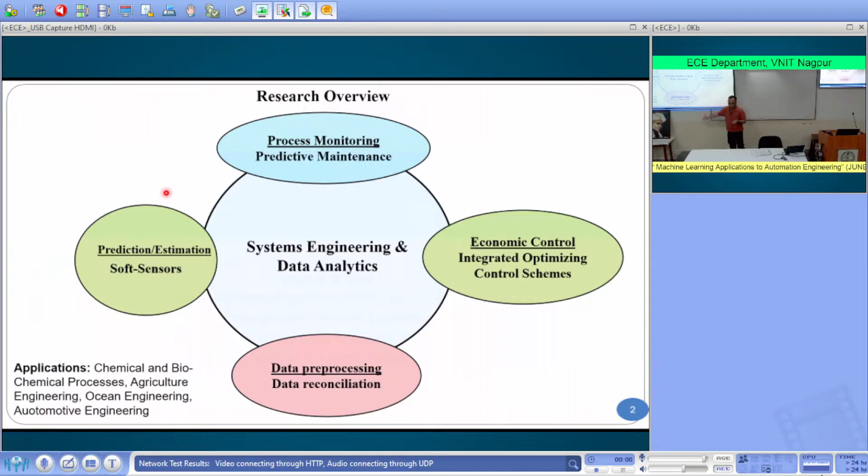To begin with, I'll give an overall hierarchy of any industry. If you look at any process industry, this is the overall hierarchy you face. Let's take any process industry like a refinery - if you have a refinery, or any semiconductor process or pharmaceutical process where you're trying to manufacture penicillin or tablets, or any process industry with several steps, this is the regular planning process steps we have.

We have a unit, a process or a reactor, let's suppose a nuclear reactor - you're trying to manufacture something through it. So you have a process or a plant, where in order to optimize or ensure safety, to control or maintain that process, you need measurements - you need to take some information from it, keep taking information. So the layer immediately after the process is something called measurement and actuation.

So which takes the measurements from the process and tries to understand the behavior. Let's suppose you go to a hospital with a certain amount of fever or whatever condition you have. The first thing is that you will put a thermometer inside, so that you get to know the condition of your body, what is the status of your temperature.

Like that you have some sensors here actually, for measurement and actuation. What is the temperature of the reactor, pressure of the reactor, what are the different conditions. So you have sensors and actuators which are directly mounted on any particular reactor, and from there you have the first layer, which is the safety logic.

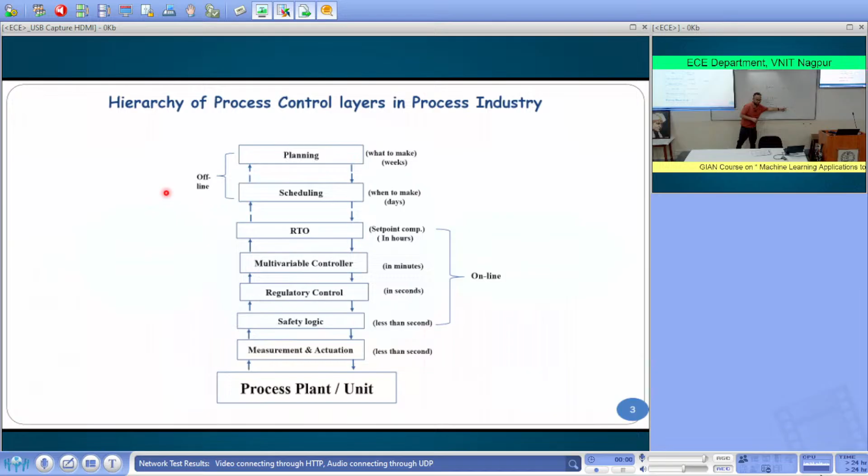So now comes the problem. If you have one reactor, it's fine, developing a model is simple. I think chemical engineers can get into this part easily. So if you have one simple reactor, I want to predict an output.

So what is the problem of first principles model? I had an introduction of first principles model. We call it first principles model in other domains. You use your physics - say you're an electronics or electrical engineer - you use physics to model a certain system. Physics-based models use mass balance, energy balance equations.

So suppose you have one particular reactor, a simple reactor, with an input and an output coming out, and some process undergoing. If it's one reactor, I can use my entire BTech chemical engineering fundamentals - mass balance, physics. I'm going to look at the physics part, not the data, understand the behavior, and come up with a model for how the variable in the reactor changes with respect to time. I can do some differential equations using mass balance.

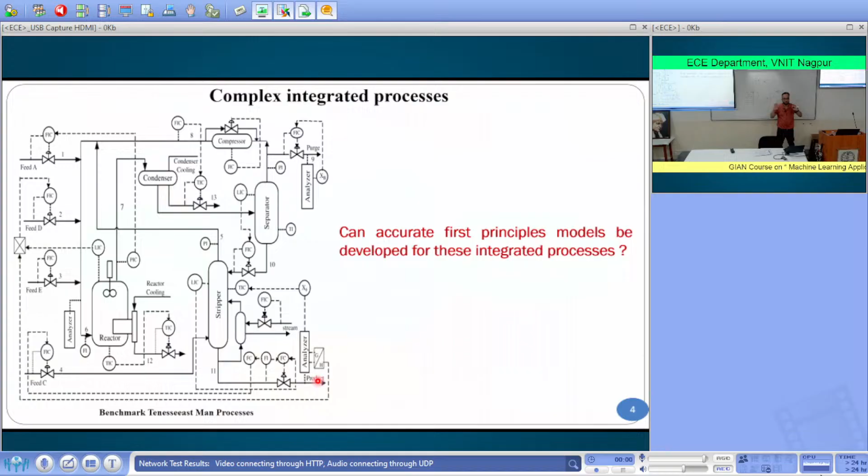So now I had an idea about the importance of soft sensors, right? You understand the importance of this. So in a controller, let's suppose you're trying to control a feedback loop. I think those who are non-domain, who don't have any idea of control...

I'll tell you, I think you have an idea but never saw it. Now the temperatures are going down, right? It's becoming cooler. So when you go for a shower, what is the first thing that you do in the morning? When you go for a shower to take water, what is the first thing that you do? Temperature checker - you open the valve, take the temperature reading, you sense it. Based on that, what do you do?

You adjust the temperature. You keep changing the valve position - there is hot water, there is cold water, and you keep both open and try to adjust how much valve has to be opened or closed by sensing it. You are sensing it and manipulating it, sensing and manipulating again - it's a feedback loop. Your brain is your controller, and you're sensing through your hand and manipulating the valve. It's a closed loop controller, like in agriculture systems - how much water has to be supplied to a field? How do you know?

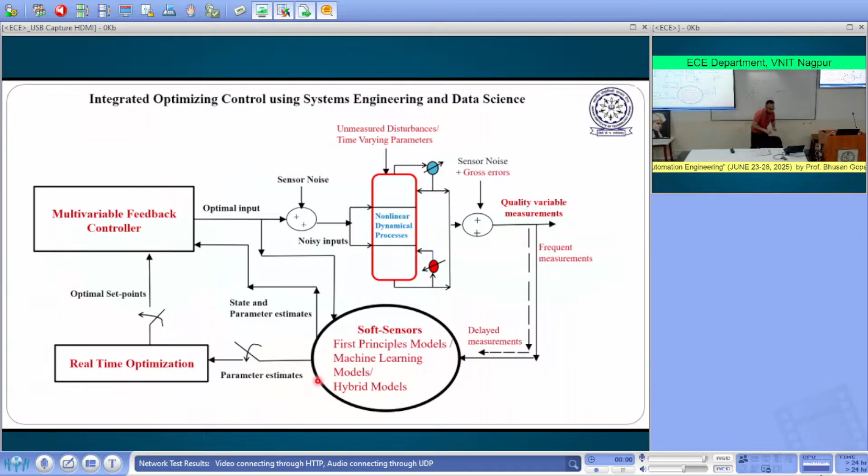So, I'm planning to give the outline of the presentation, or the next day's talk, whatever I am planning to do. I think we've covered the importance of sensors and classification of sensors.

We'll start with a simple regression model. We'll see how, for a particular process, you develop a simple regression model. I think regression has already been touched upon, but we'll see what data pre-processing is, how you do it for regression, and what problems are associated with regression, like how data doesn't come neat.

So what if your data is bad? Can a regression model be modified? Can a simple regression model be sustained if the data has noisy data? How do you modify these regression models? Regression models are not adaptive to it, so you need to make your regression models into a probabilistic sense.

So whatever we looked at in the last classes is more into deterministic regression. You did not assign any randomness to your estimates. It's more on the deterministic part. We'll look into more of the probabilistic sense.

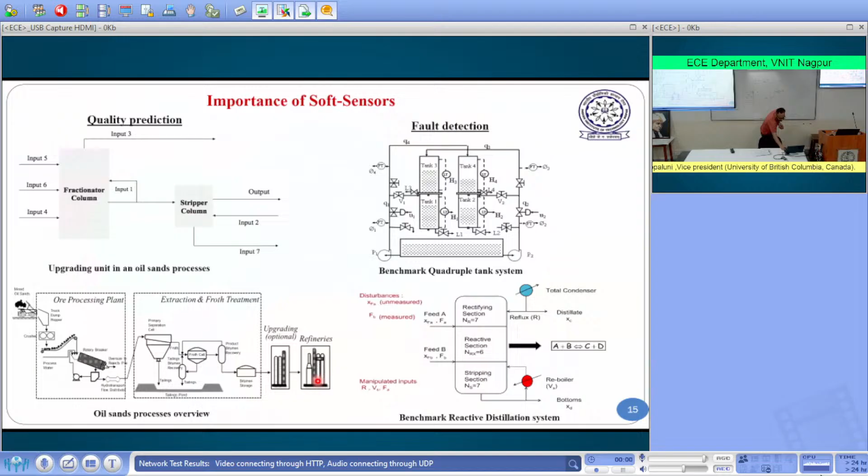So the same regression problem we can take and try to formulate it as a likelihood problem, called maximum likelihood estimation. Then we will see something called probabilistic graphical models, meaning, what if you know how output is affected? I'll just give a motivation and leave it to you.

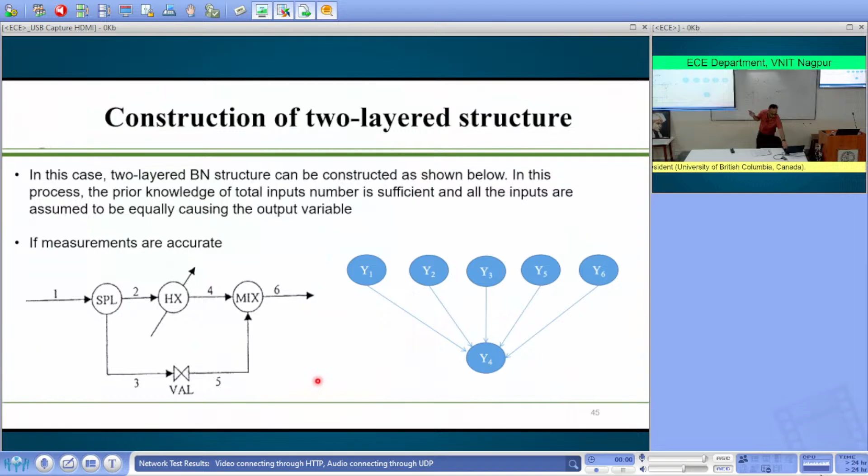So this is called one kind of hybrid model or graphical models. We are going to discuss how you are going to use this structure, coming up with different structures. Rather than just fitting a simple regression model, can you use some knowledge from the process flow diagram or process information, flow information, and fit a regression model? This can address the issues of noisy data, outliers, and the cleaning of the data — those things can be addressed.

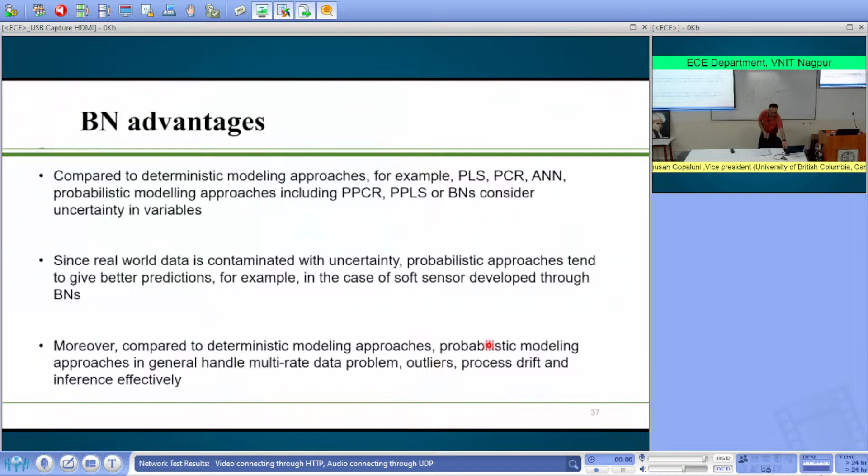So that's what we call probabilistic graphical models. We'll just touch upon probabilistic graphical models, which are quite intuitive — meaning when you want to club some physics information into your process, this is one way of doing it. Understanding the process flow diagram and trying to build or fit a regression model accordingly. So in the probabilistic sense, how do you do it? These are some important skills, like those who are doing research need to know this. Rather than getting into the deterministic part, you also need a touch upon the probabilistic sense, which has good advantages of addressing critical issues like noisy data and outliers in the data. So those things will help you. There will be more theoretical content — we may derive some things which can be helpful in the later part.

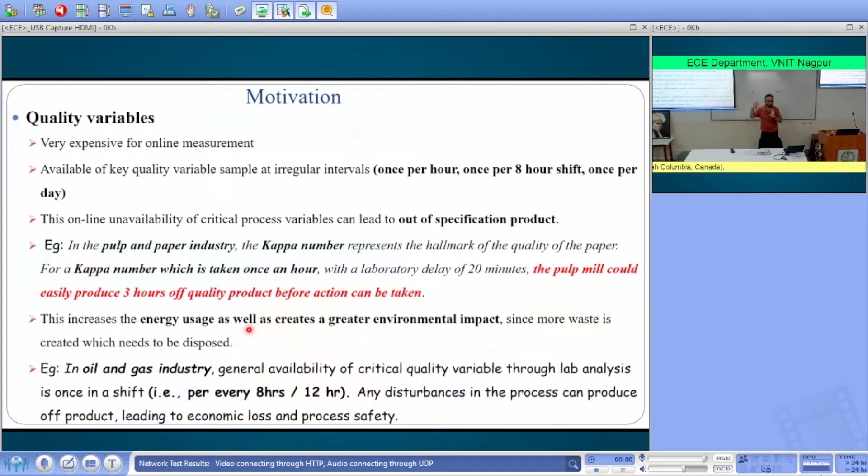So the soft sensors are classified into 3 layers. One is data driven, one is model based. Model based is what we call physics - you use physics knowledge of your own engineering domain, and those are called model based soft sensors or first principles. And the last one is called gray box.

The first one, data driven, is called black box. You don't see anything, right? It's input and output - you have no understanding of the process. You're just looking at the data and trying to find a correlation between the data. These are called black box models.

Whereas the second one is first principles or physics-based models, or model-based soft sensors. And the last one is gray box, meaning you're mixing a combination of physics and data - so I can have some understanding and some not understanding of the process. That's called gray box models.

The benefits are huge. I will show some examples, maybe at the end of the session tomorrow, we'll have some industrial case studies where we show how much it can impact an industry, actually, some predictive models.

It's a simple regression model. If you can make it well, it can impact industry in billions - it can save billions, because if you can come up with a predictive model of hydrogen sulfide or sulfur dioxide which is accurate, they can replace the analyzer completely, which costs 5 or 6 crores, and one can use your predictive model in real time to predict these variables.

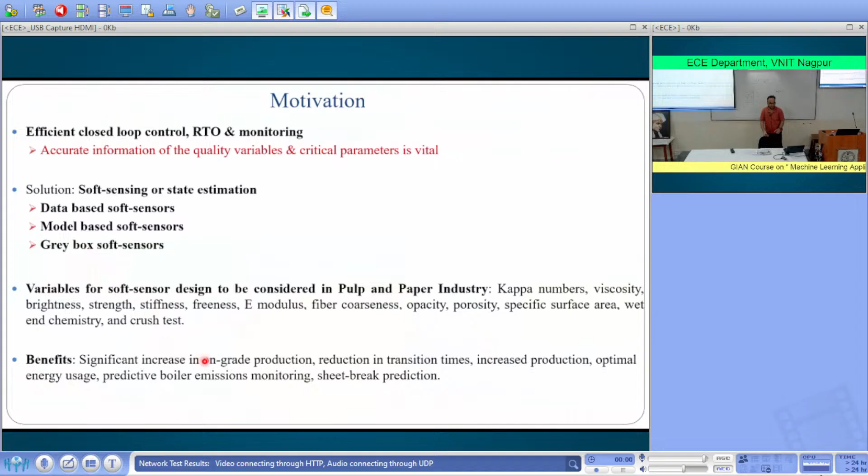Generally, you have analyzers. Analyzers are hardware equipment which can measure the critical quality composition variables, but they're very expensive. So in order to avoid this, one wants to shift to data-based or data-driven soft sensors, because I don't want to use these costly analyzers.

Those of you who have a background in refinery or have gone into an internship can easily see this - you can find these analyzer information there, which are very costly, and these are hardware devices. What if this hardware device goes bad, into maintenance? Let's suppose it's running and giving every minute measurement - what if it goes bad? It's a hardware device, it has its own maintenance issues.

If it is down, then I have to rely only on a lab sample every 12 hours. I don't have anything in between to take any decision - no measurement is coming, the process only gives one sample every 12 hours, and I have to take a decision based on that. So let's suppose I'm manufacturing or refining crude oil, which has to go to refineries - whatever I produce, if it is off spec, the entire thing is lost, the product is completely lost, I lost economy. So can I use data-driven models, where the data is saved, everything in the DCS?

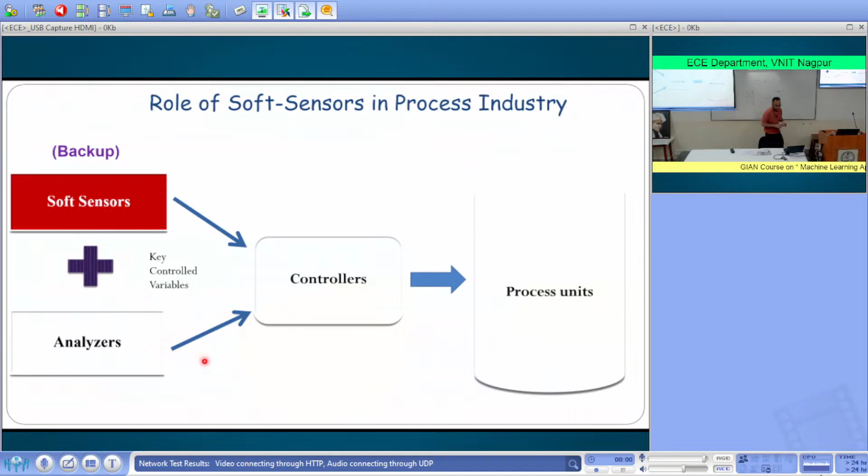Tomorrow we will discuss, starting with a simple regression and moving to probabilistic models. We will try to derive it by hand, how you can come up with a probabilistic model, how you convert into probabilistic models, and how you come up with network structure models. We'll try simple examples and show that.

It is not only a data-driven model. It can be a physics-based model which can predict, or any sort of model. It can be data-driven, physics-based, or a combination of both. So it's just a model which can predict a real-time measurement. Yes, that's a model.

No, we don't have any layer. You can have a data pre-processing layer. That is generally done before you train the model. We'll see how we do it. But let's suppose you're given clean data, everything.

So if you have a model, which model do you want to fit? If your model is accurate and you validate it accurately, then I can plug it into my computer, send real-time input conditions to the process, and I can actually see my process conditions.

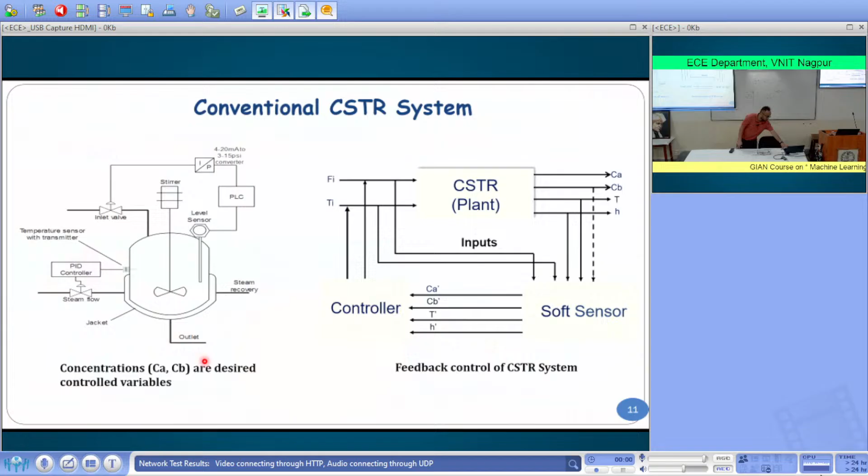The first thing is feature extraction, which is the most critical thing. In this example, if we go back here, this is one variable which I'm interested to predict, but there are almost 14 variables affecting this.

14 variables is quite less. Actually in a real industrial process, if you see a flow chart, you will have hundreds of variables affecting your output. So which variables do you select as inputs?

That is critical, right? Can I develop a model with 100 input variables and one output variable? Why not? I can develop it. Good advantages or not? Okay, that's good. What is the problem? My students are smiling.

Dimensional complexity is there, okay, that's fine. Let's suppose I build a model, forget about dimensional complexity, I'll do it offline. What is the real issue I get when I implement it online?

I'll use a high-power computer. I have 100 inputs coming into my model, y equals f of u1 to u100. There are 100 inputs entering the process and I need to monitor all 100. You build a model between 100 inputs and one output. Good, it's giving very good results. Now I put it online. What challenges do you get?

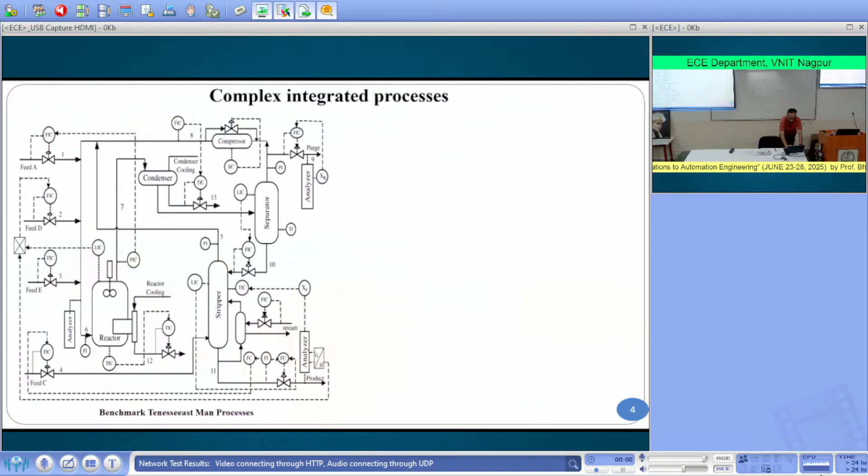Though in an industry there are 2 plants which are different, I think each industry will require a different kind of model. So we can't implement one model. No, you can't, the system is different.

Let's suppose we are going to discuss that. Let's suppose y equals to ax plus b. Simple model, linear model, one input is there, one output is there. Let's suppose, what are the unknowns here? A and B. A and B are unknowns.